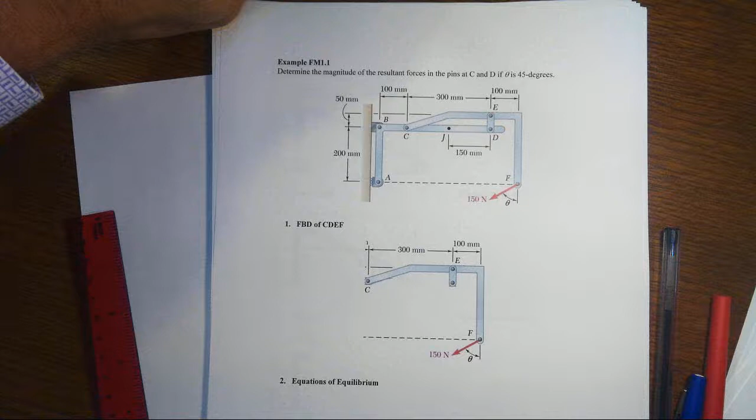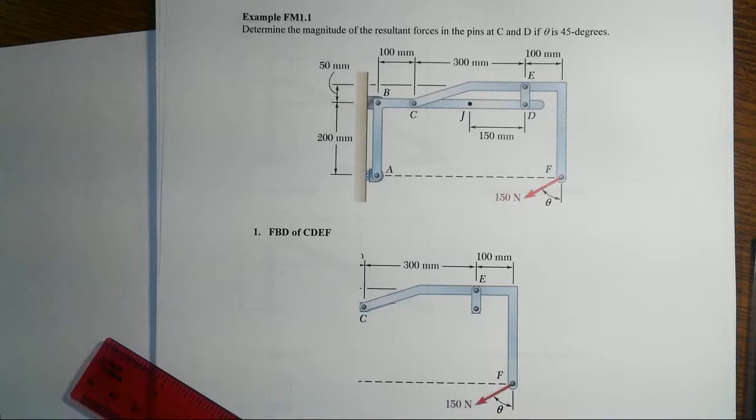Alright, in this numerical example of analyzing a machine or frame, this would be a frame because it's not mobile. Machines are mobile. We've got a system with a 150 Newton load at a 45-degree angle from the vertical. Now, one of the things we've got to do is solve only what's actually been requested here.

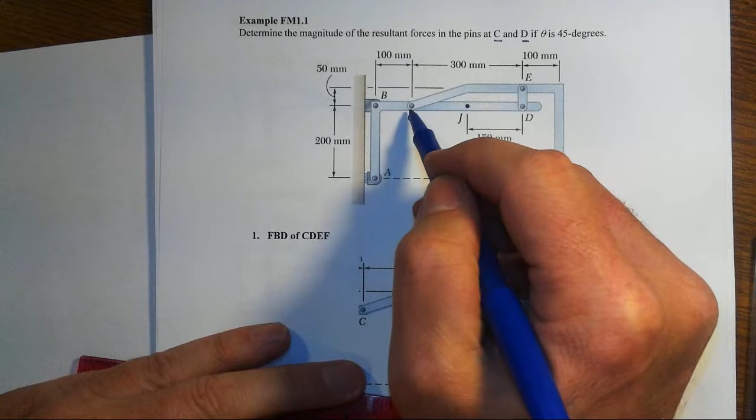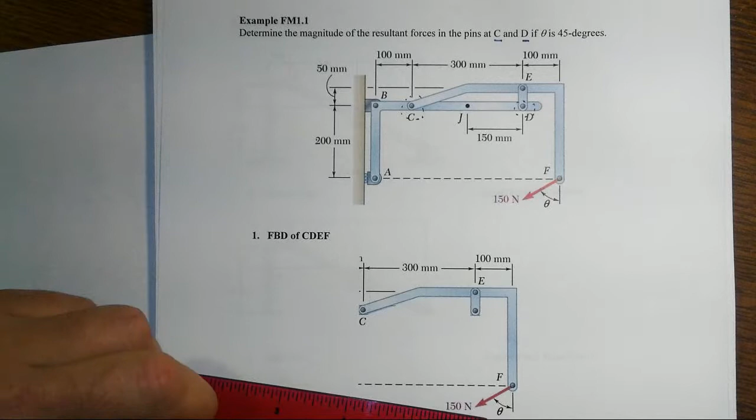We want the magnitude of the resultant forces in the pins at C and D. Right, so there's C and there's D. They're not asking us to find the reactions, so let's not find them unless we absolutely have to. Of course, step 0 is figure out what the find is. Find the find.

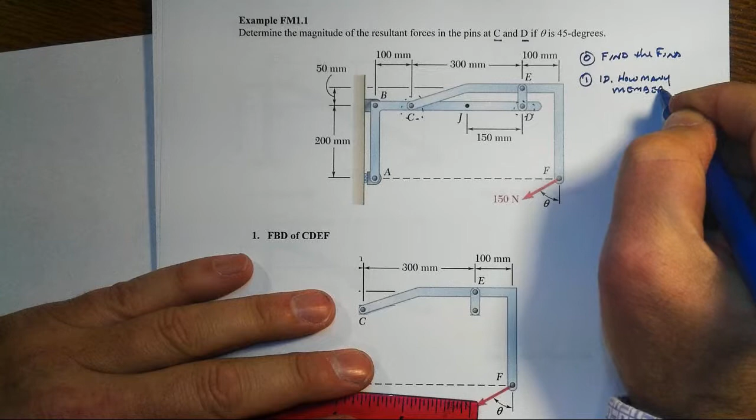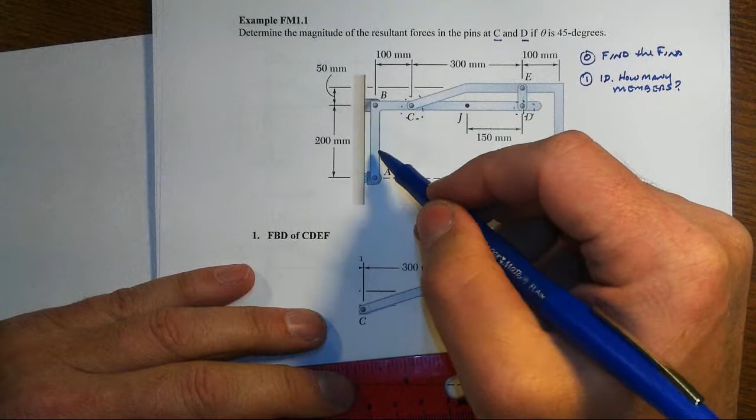Step 1 is identify how many members, and do you interpret the drawing correctly. In this system we've got 1, 2, and 3 members. They're not joint to joint, they're where the pins are at. Unless we're told otherwise, we have solid pieces, so this L bracket here, A, B, C, D, should be interpreted as one long continuous piece that's pinned at A to the external support, pinned at B to an external support, has another member pinned at C, and another pinned at D.

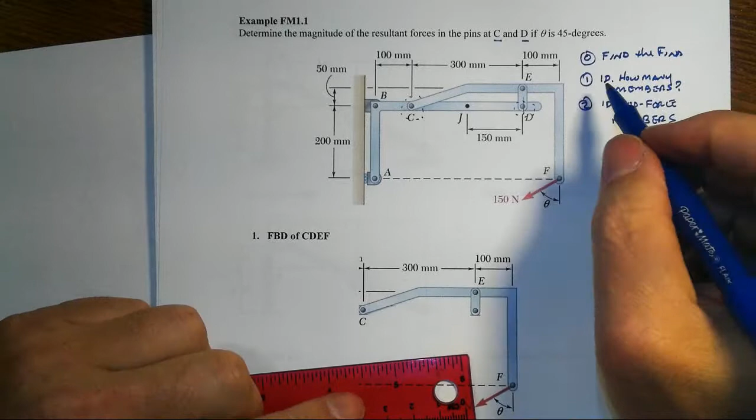And then we want to identify 2-force members. Remember, the way we do this is pretty simple: if they have only 2 pins, and no other forces applied to them, they must be a 2-force member, such as ED.

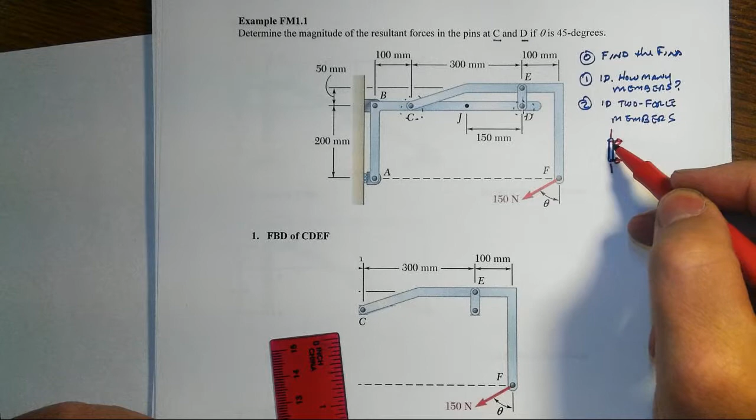So we'll show that. Remember, it's a little short link, it's only got pins at E and pins at D. Notice sum of moments about E tells us that dx has to be 0. Sum of moments about D tells us that ex has to be 0. So therefore, this has to be a member that's either in compression or in tension.

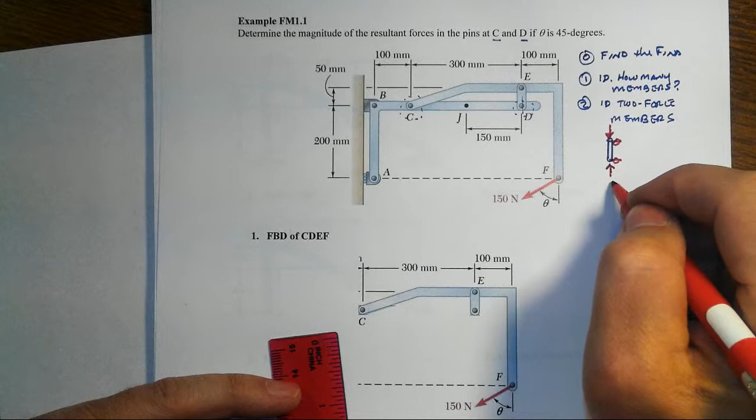So note, if we were to pull the pin at D, this whole system that would be left over would want to spin about point C in a clockwise fashion. In other words, it would want to try to squeeze that member. So if we put it back into place, it's got to be in compression. That's what's going on with that short link, and that's crucial when we come back.

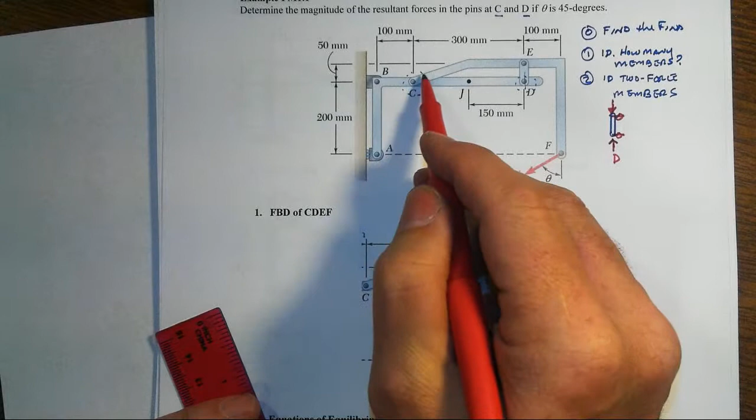To what we've got down here for this free body diagram of this whole little piece. There's your D, and over at C we pulled a pin. This is a multi-force member, so I don't know initially what those components are going to look like. CY and CX, they're just independent. But note, on this subassembly here, I've got the applied force of 150 newtons. We have the internal force at D, which is the pin force at D, and it looks like we have 2 forces at C.

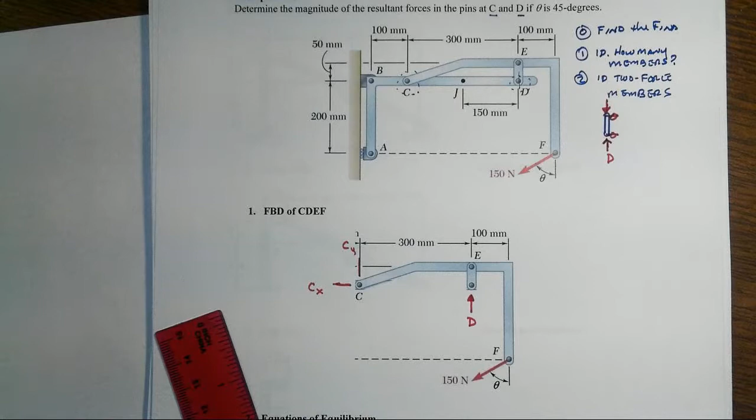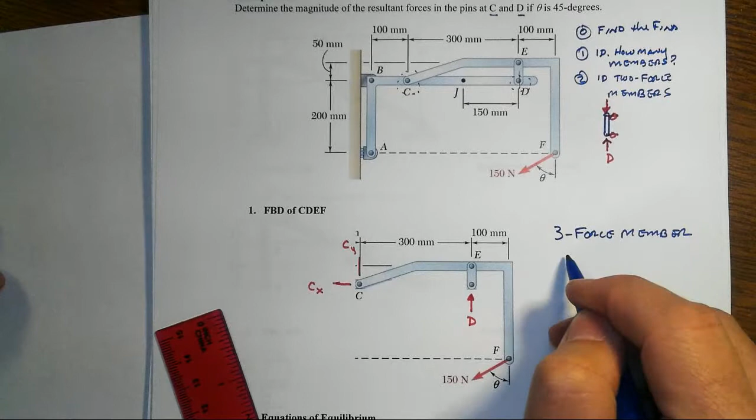But those can be resolved into a single force, right? A force that has magnitude and direction, and that means we have a 3-force member, and a 3-force member must be a concurrent force system, meaning all the lines of action of the forces must pass through a common point.

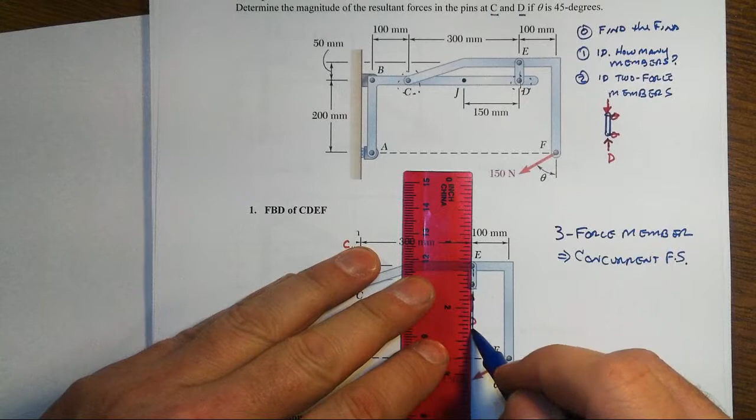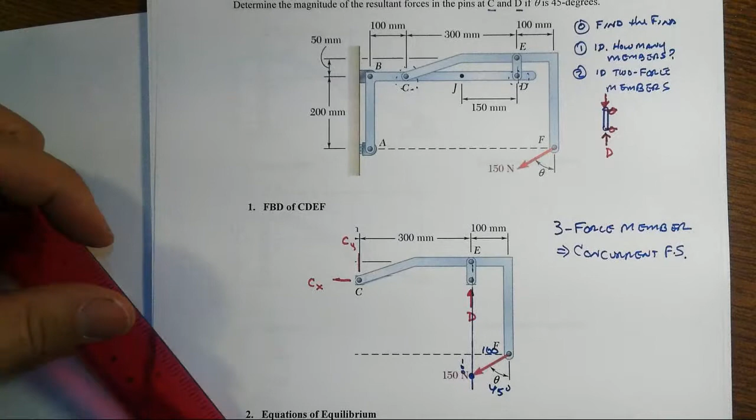And so that means we come down here, this is really 45 degrees, so that's 100 here, 100 there in millimeters, and even though that's not quite exactly to scale, it tells us what has to be happening: CX, CY must resolve to a line of action that passes through there. The only way to do that is if CX and CY both point towards C or they point away from C. Let's see what might really be happening.

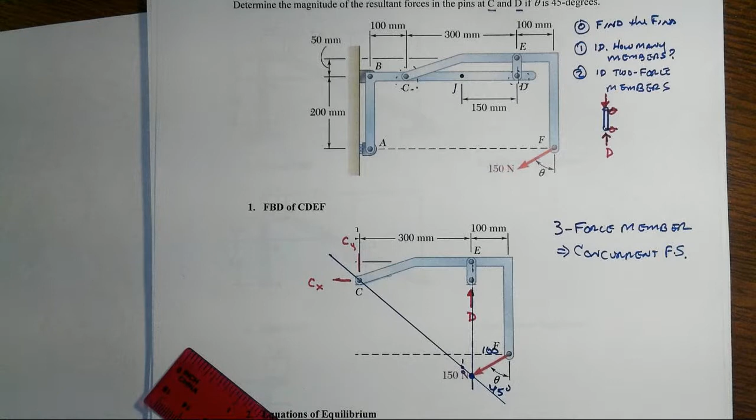We don't know yet, maybe. I can anticipate what's going to happen, but that's because I've actually looked at this problem a number of times, so I'm cheating. Alright, so let's get our 150 newtons roughly at a much better scale of 45 degrees, which is where it's at for our analysis.

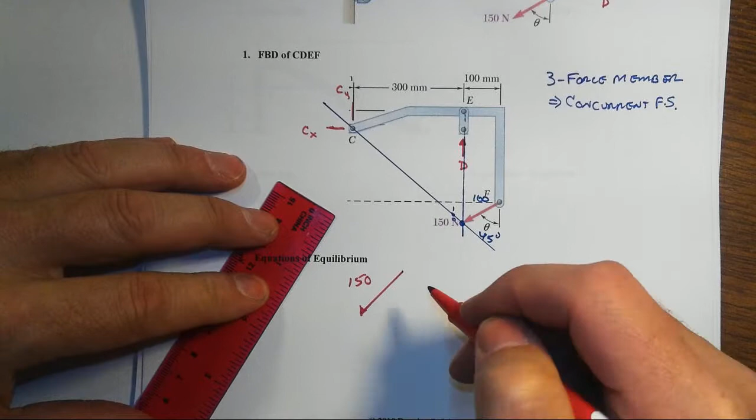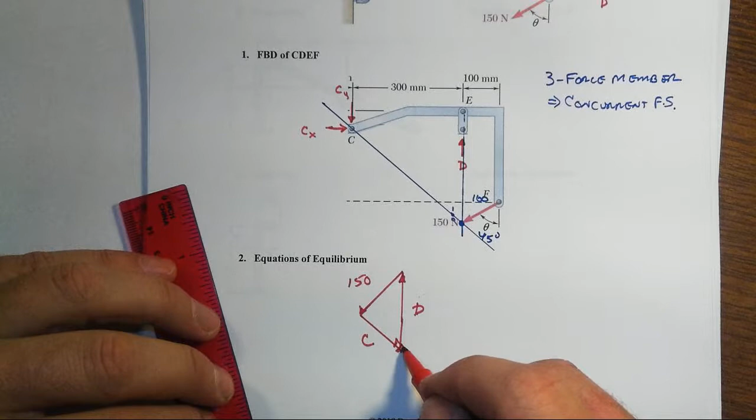There's 150 newtons. We know that D is vertical, and all I know is it's going to be going up, and with tip to tail construction, the force triangle means that C has to be coming downwards to the right. There's your D, there's your C, and that means CX, CY have to both be pinching towards point C to get this downwards to the right, so that this force triangle closes off, the circle goes around the triangle.

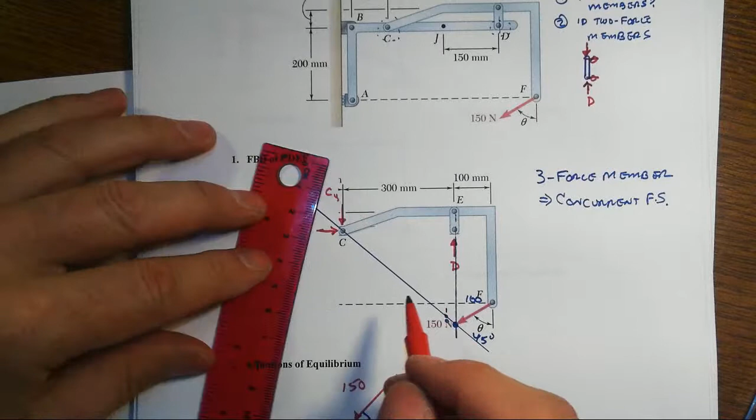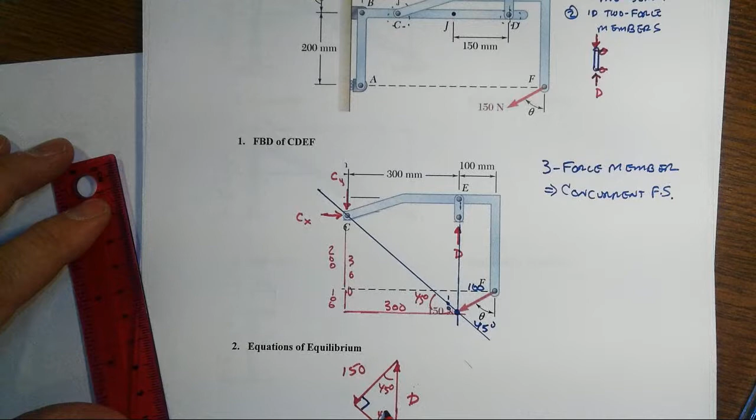That turns out to be 90 degrees. That's just happenstance in this situation, because that was 100 down, 100 over, 100 down, and then we go 300 over to point C, and to go up to point C we had 200 to that dashed line, and then another 100 to get to that location, and that meant we had 300, 300, or 45 degrees. That's how I knew that, which meant that with that being 45, and this also 45, therefore that's 90, and that makes it actually really easy to figure out.

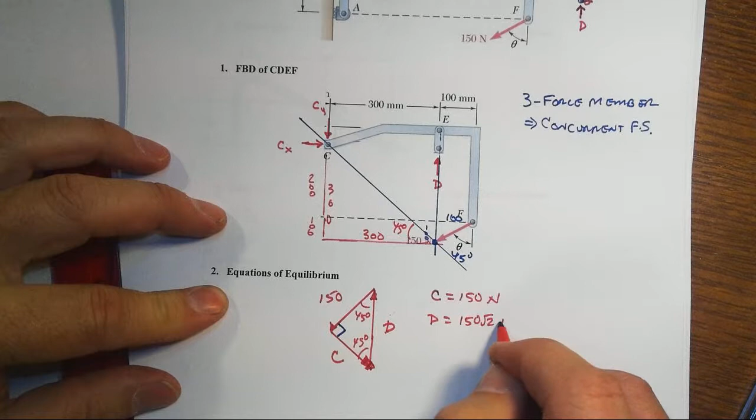This is a statement of equilibrium. C will have to be equal to 150 newtons, and D will have to be equal to 150 root 2 newtons. Because we're only asked to find the magnitude, not the direction, of the resultant forces, that's a complete answer for what we've been asked to find.